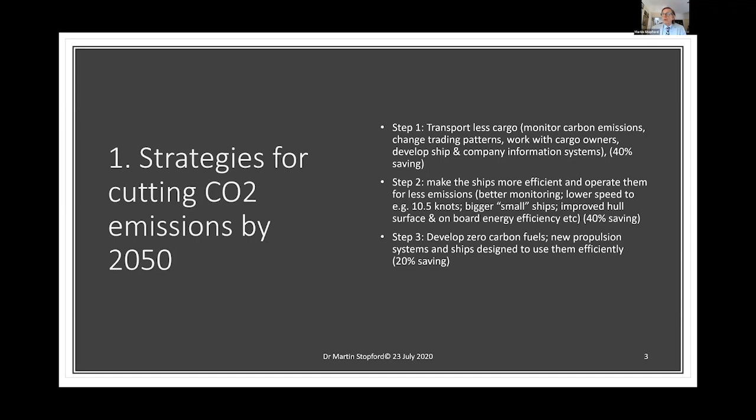The second step is to make the ships themselves more efficient and enable them to operate with less emissions. And that means better monitoring, lower speed, using bigger ships, improved hull and surface, and onboard energy efficiency. And again, it covers a lot of different areas which are of great importance. Step three is to develop zero carbon fuels, because a lot of the things I'm talking about we can do with the existing fuels, but to really get to zero carbon emissions by merchant ships, we need to be burning fuel which does not emit carbon. And then finally, we need to develop the I-4 technology that we will need to do all of the first three steps. So that's my agenda.

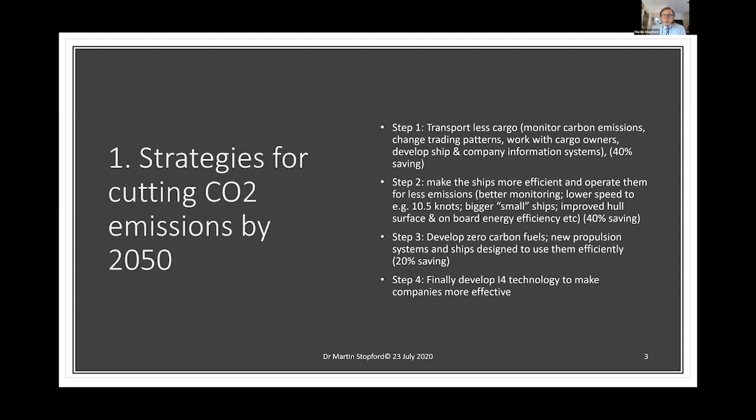When we develop these strategies, we need to start by thinking about the emissions of the existing fleet. We have today 99,000 ships of 2 billion deadweight tons, and they were mostly built over the last 25 to 30 years, and they emit carbon using diesel engines and technical systems pretty much from the last generation. And so the challenge here is to retrofit as much technology as we can onto the existing fleet, because these ships have about 2/3 of their useful life to go.

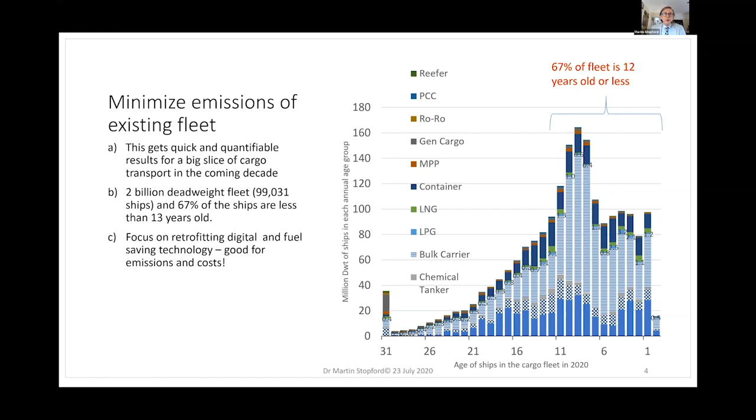And so many of them are quite modern. And so we can focus on these modern ships and trying to make them as carbon efficient as possible. And that gives us quick results, which I know is something that IMO and our governments want us to do. The second thing is to use bigger small ships.

And so we'll be hearing later in this seminar about China's zero carbon container ships being delivered at the moment. And that sort of short sea shipping is very effective and has big savings, much bigger savings per TEU than you would get if you just build a much bigger 22,000 TEU ship.

The third point I want to make is that we need to develop strategy tailored to each market segment. And there are many different market segments in the merchant fleet, as you can see here. Bulk carriers and tankers, there's very big tonnages, but cruise, ferries, offshore, tugs, dredgers, reefers, chemical tankers, vehicle carriers, liquid gas carriers.

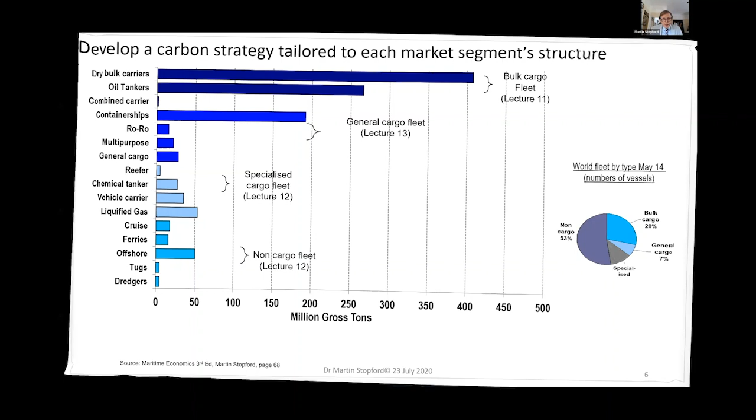If we move on now to the innovation scenarios, these are based on the 3 scenarios in my paper, Coronavirus, Climate Change and Smart Shipping, which was published by Sea Trade in May. And what I've done is to develop a series of scenarios that deal in the short term with the impact of the coronavirus pandemic, and in the long term about how we can reduce carbon emissions across the merchant fleet.

We start off, the first step is the trade scenarios. And if we take a look at these, I've got 3 trade scenarios. That shows billion tons of trade on this axis, from 0 to 30 billion tons. And scenario 1 shows trade dipping slightly in the next couple of years because of the coronavirus epidemic, and then expanding to 21.6 billion tons by 2050.

The second scenario has a slightly worse recession in the short term, and trade grows to 15 billion tons in 2050. And the third scenario shows a deep dip. This is a more extended coronavirus recession, rather like the 1980s was, and then trade grows very slowly to 11.6 billion tons in 2050.

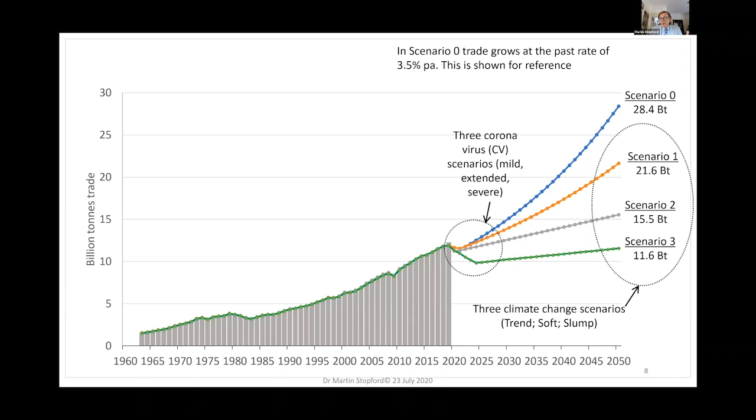And secondly, the challenge of different trade levels for 2050. And one of the big impacts on the amount of emissions the industry makes is how much cargo the world wants us to shift in 2050. And in fact, you can look at these on the slides when you see them afterwards, but this is the 3 trade scenarios.

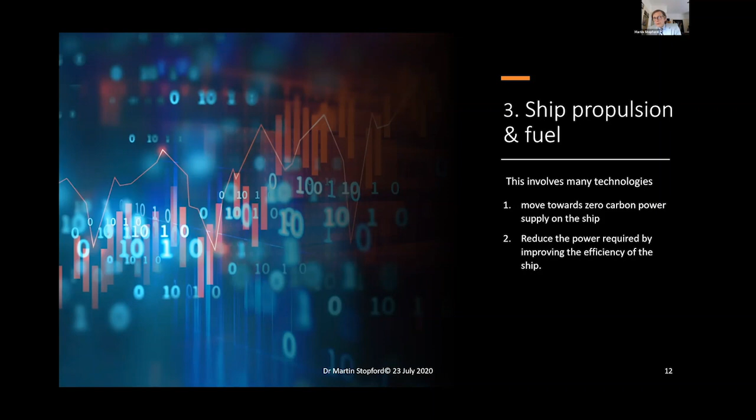Let's just take a look at this. If we start with where we are today, I'm taking a typical bulk carrier, 64,000 tons, 13.5 knots speed, burns 22 tons per day of bunker oil.

That's 129 grams per kilowatt hour, and it produces 7.3 megawatts. And one of the big decisions, well, two of the big decisions that we have to make as we go forward is whether we switch from an internal combustion engine to burning LNG, LPG, methanol, ammonia, hydrogen, biofuels. All of these are being discussed. They're all in play. They all have strengths and weaknesses.

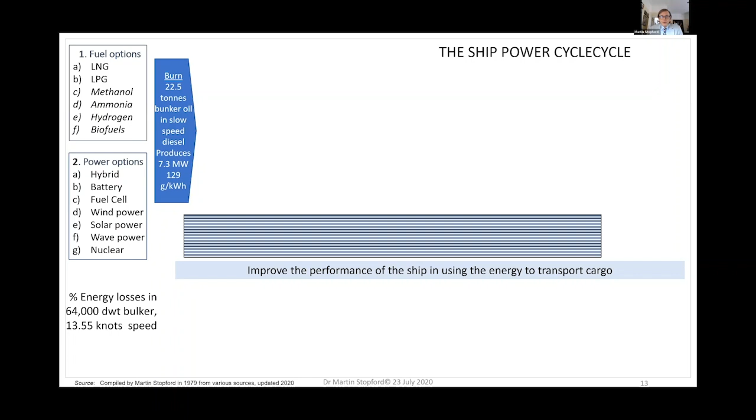And these are the fuels, and the power options we have are hybrid, that is diesel and battery, pure battery, fuel cell, wind power, solar, wave, and nuclear. These are the options that we have there. And the current fuel systems for diesel engines lose about half of the energy. About 51% of the energy burnt in the engine is lost in heating the engine and exhaust emissions. And so obviously we can continue to work on reducing these losses and making the energy slightly more efficient, so you recover slightly more than

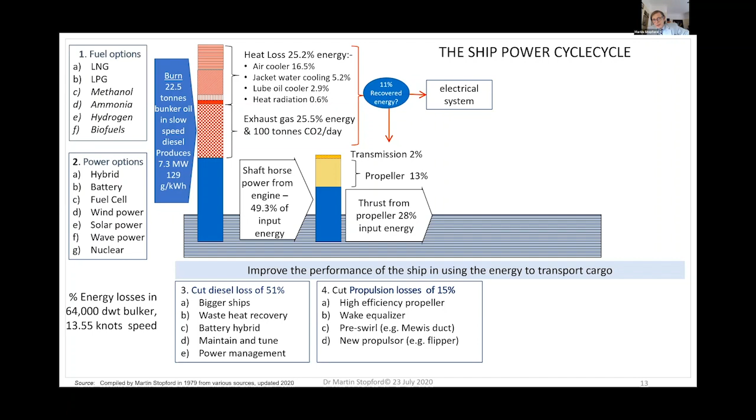And again, we're looking at ways that we can cut propeller losses of 15% by a more efficient propeller, wake equalizers, pre-swirl, new propulsor. These are all things that people can look at. Very difficult to do. We've been working on these for a long time, but there's still possibilities. And indeed, you might go for a completely new system. Again, the NYK ship uses a flipper, which may be a peculiarity. It's a car carrier, and it might not be so easy on other ships, but that's a radically different sort of propulsor.

But moving then to the operation of the ship, we take the 28% passed on to the propeller, and we reduce that to 16% due to wave making and air, weather, and resistance and so forth. And so we can look at ways of reducing that energy loss through speed, hull coatings, air lubrication, ballast-free design, and light materials, etc. And then finally, of course, there's operations.

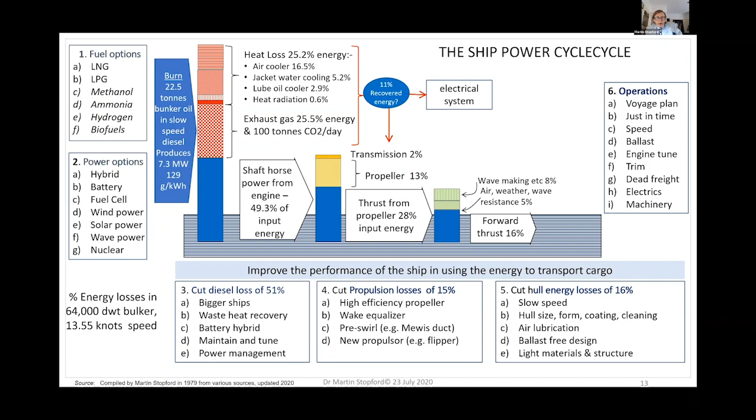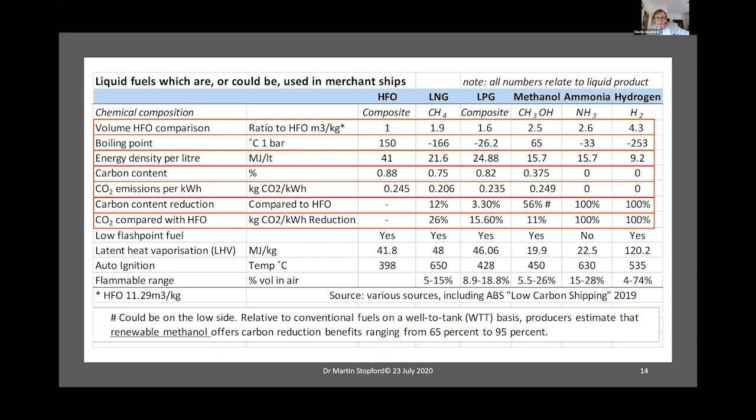If we now move on to ship electrical systems, the purpose here is to optimize the electrical system so that we can get some direct savings out of this by bringing in batteries and solar and other sorts of electricity. But it's also an important framework for the ship of the future, which may very well be principally a fuel cell type of ship. So we have at the moment a fuel supply of 2 tons per day of diesel oil, and that goes through the system of medium speed engines, generators, AC or maybe DC distribution. Some people say that would be better, to the main switchboard, and then distributed around the ship and to the machinery. There are various things we can do here.

We can get a shaft drive from the main engine. We can install batteries to interplay with the main and emergency supplies of electricity, and we can bring in solar, wind, wave power, and they can go into the system, either into the batteries or into the current use of the ship. And finally, fuel cells in the future, burning the various zero carbon fuels, and they would fit straight into this framework. So the great thing about going down this route is you save carbon in the short term with some of the things you can do immediately, but you also build the framework for step 2, for the next wave of zero carbon propulsors.

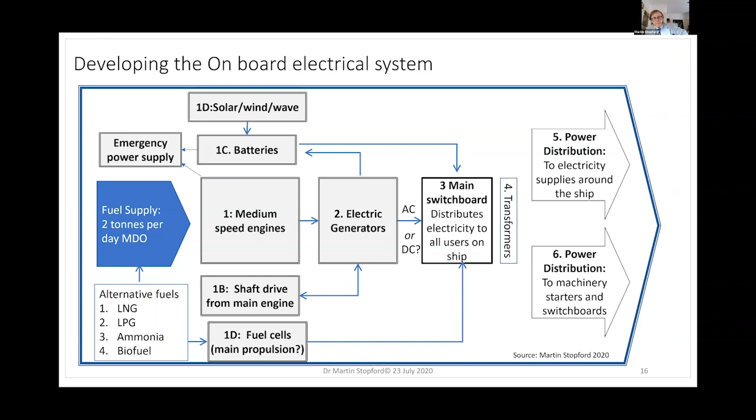And finally, functional control systems of the ship. If we want to get to zero carbon emissions, we're going to probably have to control the ship much better and be much cleverer about the onboard efficiency.

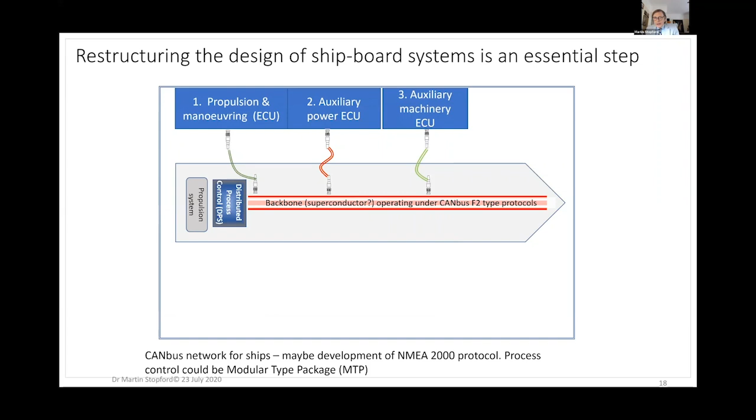And there are 2 things here. One is the control area network. And the idea here is that we have 8 or 9 different systems on board the ship. And at the moment, the messaging between these systems is not structured in terms of a protocol like the CAN bus that they use in motor cars. And so the idea is we introduce a control area network, and that is operated under protocols which have yet to be agreed, but I believe one of the committees is looking at this.

And the idea is that you develop your, say, navigation system, and you plug that straight into the backbone. Each of these has an electronic control unit, and it means that you can optimize the functional system, but it plugs into a standard electrical information system on the ship, as a result of which everything is integrated and very efficient, and all the information that we need can be collected and analyzed, and this information can be viewed on the ship, or equally importantly, it can be viewed by the office on land or by the regulators. Many ways of using this advance in the design of ships, and it is very well proven on land.

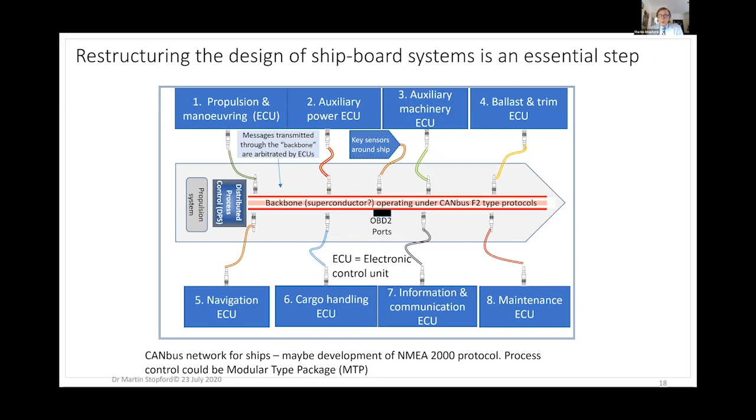Well, okay, in conclusion, let me just briefly summarize. Emission scenarios that I analyzed suggested that we could meet the IMO's 50% reduction in 2008 emissions by 2050, and in fact substantially surpass that with only a certain amount of reliance on zero carbon fuels. We can start by systematically retrofitting existing ships, and that gets us quick results and also helps us to get better information for planning the logistics and operation of shipping companies.

We need to develop a new generation of low emission designs around the diesel engine. That's the second step. It's something we can do today. We know the diesel engine very well indeed, and we can start to find ways right across the ship to optimize the performance using both digital technology and new technical innovations, of which there are many becoming available. A related topic is that LNG technology is very well known, and we start to use that as a fuel. It's still a fossil fuel, but we get maybe 15 to 20% savings right away. And if we put in hybrid battery power, we can probably improve on that as well and use cold ironing.